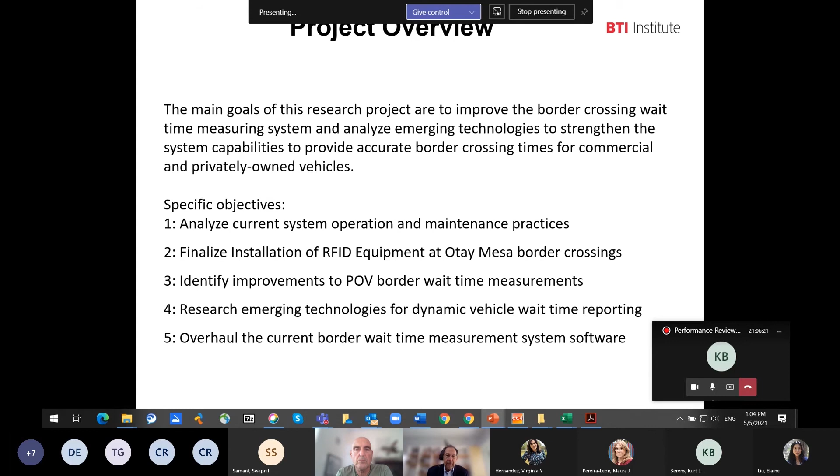So here you can see the 5 objectives. I'll go through each of them in detail and the achievements of each of these objectives, and then we can have a discussion. So again, the goal is to improve the border crossing wait time, and the knowledge gap is to use emerging technologies to improve these border wait time measurement systems and provide reliable and consistent information to CBP, as well as to other stakeholders from the private sector as well as the public sector.

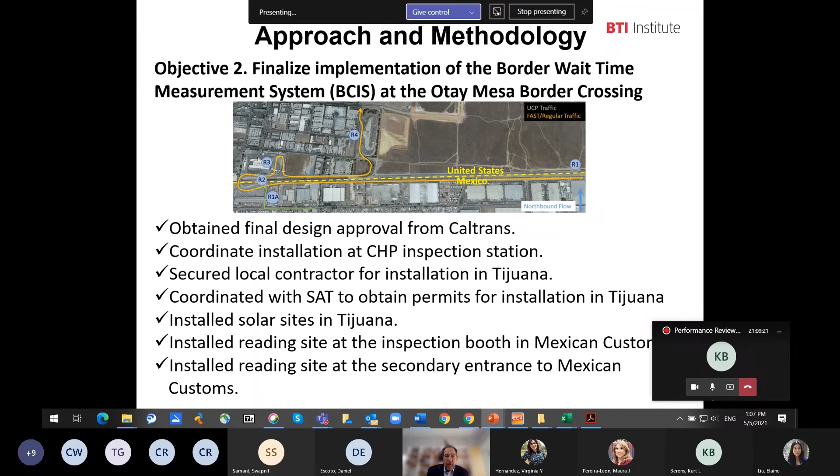In terms of objective number 3, which is improvements to the POV. POV stands for privately owned vehicles. So basically, these are the passenger vehicles that cross the border into the U.S. from Mexico. And the main objective is to improve the system, because right now the system uses Bluetooth technology, and we cannot differentiate between the different types of traffic for POVs, which includes SENTRI, Ready, and regular.

So these are the tasks that we performed during the whole objective. The literature review basically tried to identify if anything has been done. Then we did a detailed analysis of the findings. Then we developed this prototype to enhance the border wait time system, and we did some testing at College Station during the pandemic, and we finalized a report.

On number 4, we analyzed different technologies, and the three finalists are GPS, blockchain, and connected vehicle. And the one that has the most future for border wait time measurements is GPS. So we developed a hybrid system, which is basically a combination of RFID, Bluetooth, and GPS. We presented a paper at the Transportation Research Board annual meeting 2020. And then we also recently presented the findings in March at the Port of the Future conference.

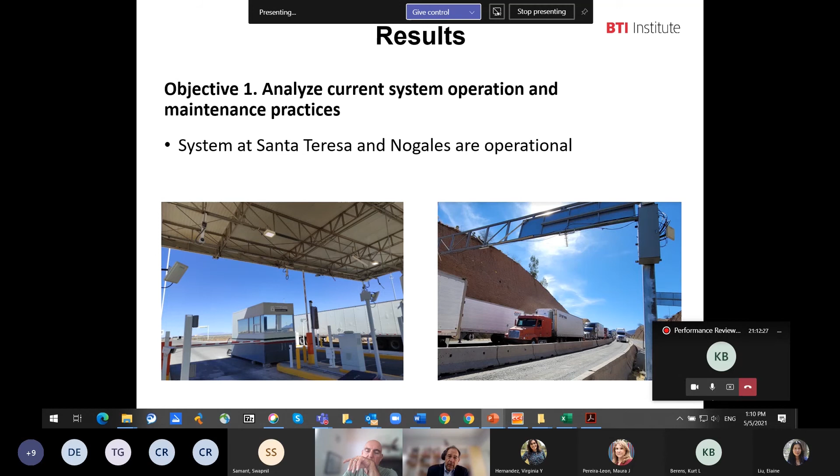The 2 crossings in Santa Teresa and Nogales are operational. As I mentioned, we work with Mexican and U.S. authorities, for example on the right-hand side is the Nogales Mariposa port of entry. We added a reader to measure the fast lane. That's why I was asking in the previous presentation about the fast lane. Nogales has 1 fast lane, and we were able to measure regular and fast crossing times for trucks at this particular crossing.

We also discovered that all RFID readers were not reading all the tags. That's because CBP recently changed the technology, now has this decal and transponder online procurement system, a new tag, which is DTOPS. So we identified that problem out of Otay Mesa and came up with a solution. Basically, we need to refurbish all the readers to have a multi-protocol so they can read multiple tags at each of the crossings. So we coordinated with Transcore, who is the developer and manufacturer of the readers and antennas.

This is Otay Mesa. I don't know if you can see my mouse, but here is Mexico, and here's what we call R1, the quote-unquote end of the queue. So we installed a reader bank there. Then here's the Mexican Customs export lot. And then we identified that there was another entrance for the UCP, Unified Cargo Processing. So these trucks here don't really use the corridor, so we had to install another set of readers here. So we install R1, what we call R2 at the Mexican export lot, then R2A, which is the secondary entrance. R3, these readers were installed during the previous project, so in this particular objective, we only refurbished those ones.

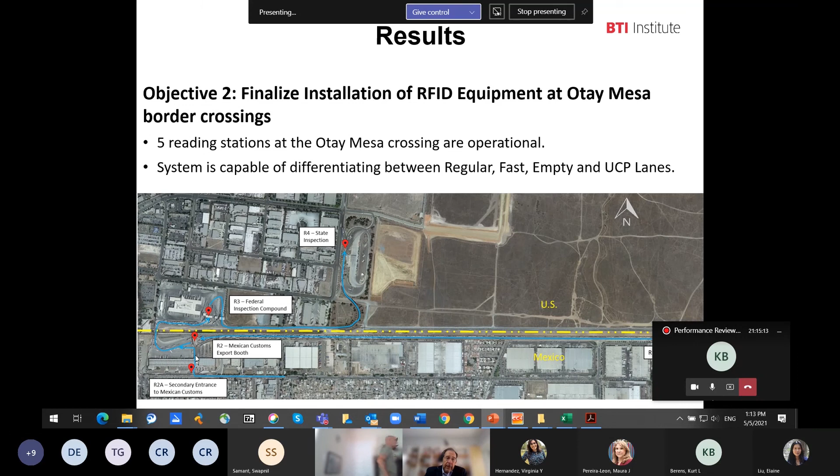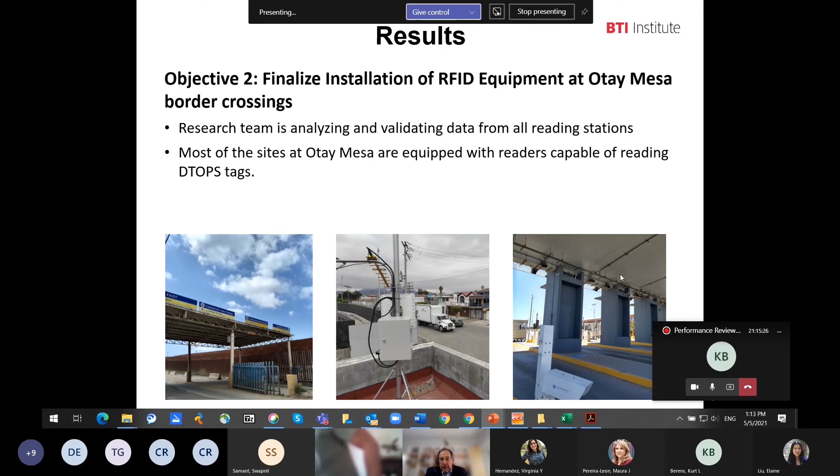Here's just some photos of the installation that we have in Tijuana. This is R1, the one I mentioned. This is R2A, and this is basically the Mexican export.

On objective number 3, which is basically the improvements, as I mentioned, we came up with different technologies, and we came up with this prototype, which is for POVs, privately owned vehicles. And we have a toll booth in Mexico, especially in Texas. All the bridges have a toll booth. So our idea is to use different technologies in each of the segments.

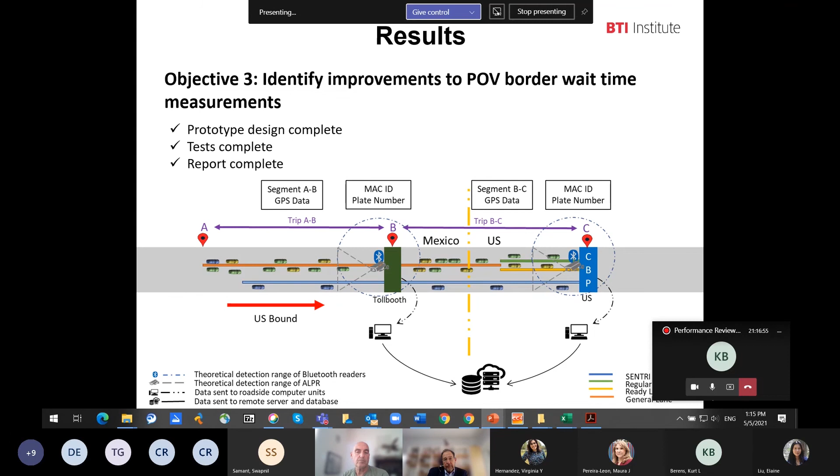For example, in this segment we're proposing to use GPS data, because here we don't need to differentiate between any lane, we just need the travel time. Here we can use Bluetooth, where we can read the MAC ID and also put a timestamp at the toll booth. Then there's a bridge in Texas, so you can cross. And then here we can have the MAC ID to match between B to C, the trip B to C. We can also use GPS to come up with the travel time to make sure. An important thing also is this device here, which is an ALPR, automatic license plate reader, which identifies in which lane that particular vehicle is circulating.

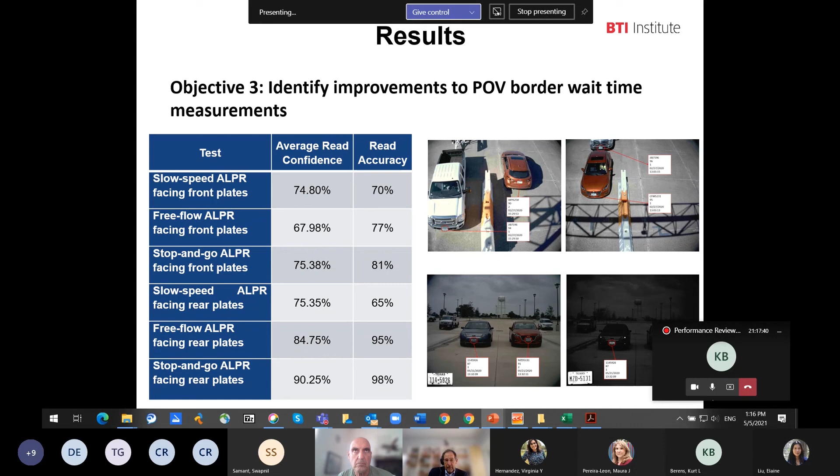Here's the test that we performed at the RELLIS campus in Bryan, Texas. We did very extensive testing of the license plate readers. The main reason is because even though they're used for tolling throughout the country, in this environment at the border, the vehicles are very close to each other. So the main question was if we can read enough license plates to come up with a good estimate of travel times and specific lane configuration. And the test was very successful.

On objective number 4, as I mentioned earlier, we came up with this hybrid border wait time measurement system, which uses different technologies to come up with a more accurate, easier to operate and maintain system. So here are the benefits.

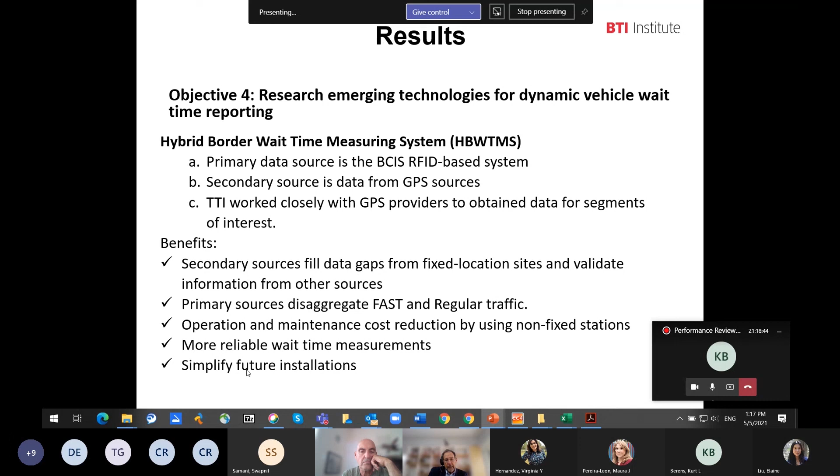Again, we can have secondary sources to fill the data gaps that we will have. We can disaggregate by fast and regular traffic because we already have the RFID tags. This will reduce the cost of operation, maintenance, and installation, which is very time-consuming and difficult to coordinate because multiple stakeholders participate in the process. And again, it will simplify future installations.

The final objective was the overhaul of the system. Swapnil Samant at our El Paso office was the lead on that particular task, and he defined the new system using a cloud-based database, the Azure environment, which provides different advantages.

Now we can have a specific system for each of the crossings. We can have a faster way to query the data. In the past, the old system was on a server, and it was difficult to query, especially with the amount of data that we have.

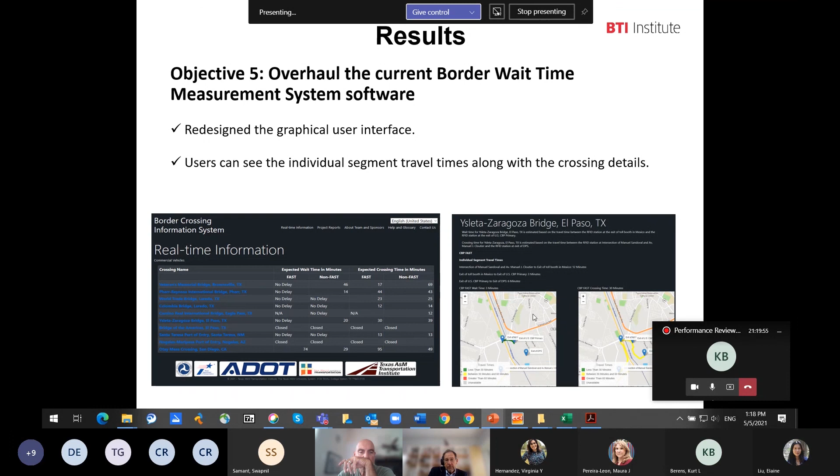Here's the new border crossing information system that is based on the cloud. We have a table showing the fast and non-fast crossing and wait times. We also have detailed real-time information on each crossing with color coding, like you can see on your phone. We're finalizing this website, but it's already operational.

In terms of findings, the benefits are Otay Mesa is operational, which is good. We just need to do a ground truth test that Jim Patton requested, so we're working on that as we speak. And CBP will have automated border wait times now for 98% of the trucks entering the US.

So we have 10 truck crossings already with the system implemented. We're working with the Texas Department of Transportation on a different project to install another 5 crossings in the near future.

With the overhaul of the system in the cloud server, again, we provide information more efficiently and the queries can be done faster, as I mentioned already.

In terms of new technologies, POV wait times could be measured by segregating regular, SENTRI, and Ready vehicles with the system we are proposing. The hybrid system will increase reliability and reduce the costs of installation, operation, and maintenance of the border wait time system.

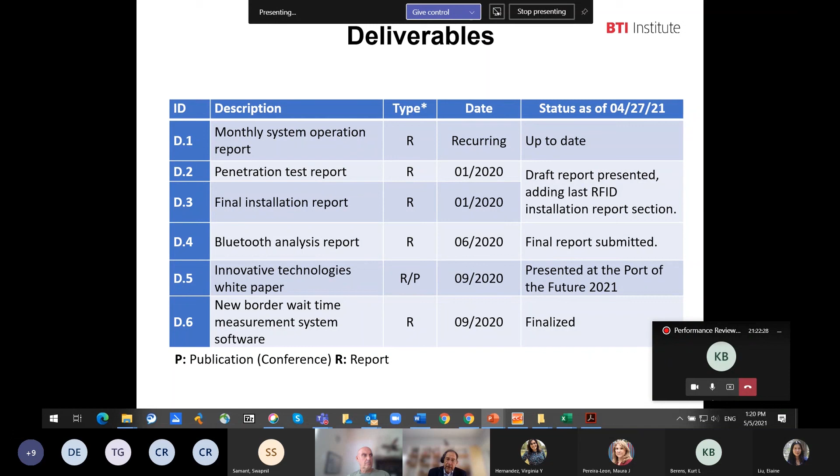The Bluetooth analysis is basically for POV. We presented our report, and there's a white paper that we presented at the TRB, along with a presentation at the Port of the Future conference in March. Finally, Objective 5 was the overhaul of the system, which we were able to finalize last week.

In terms of the hybrid border wait time measurement system, it will reduce implementation and operation costs, and it will be more accurate in providing border wait time and crossing times for both POVs as well as trucks.

For the GPS data source, we have continued investigating. There's more and more data coming from GPS providers, aggregating data from many different sources. We use HERE data and continue to receive feeds from that information, which will be really important in the future because there's no infrastructure on the ground, so it's easier, cheaper, and more accurate.